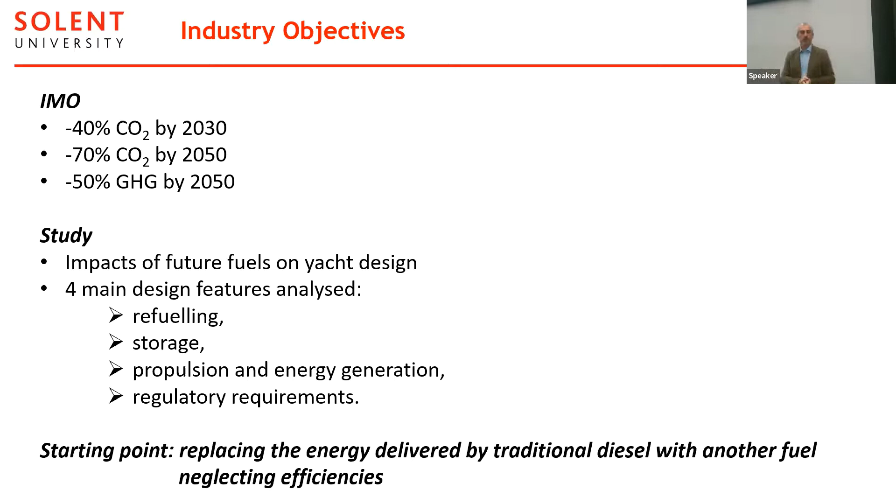Next: the starting point is a kind of modern super yacht, an explorer yacht, 68 meters, able to cross the Atlantic. This was developed as part of the course in super yacht design here at Solent. We are really interested in the main characteristics of this yacht in terms of engine requirement: two engines of 1,678 kilowatts, and the amount of fuel able to cross the Atlantic.

So with an autonomy of about 4,000 miles, with the amount of fuel we need, we need to design on board a storage of 109,000 liters. That's basically our starting point. And from this amount of fuel, we've worked with equivalent fuel to see what happens if we need to swap tomorrow to different fuels.

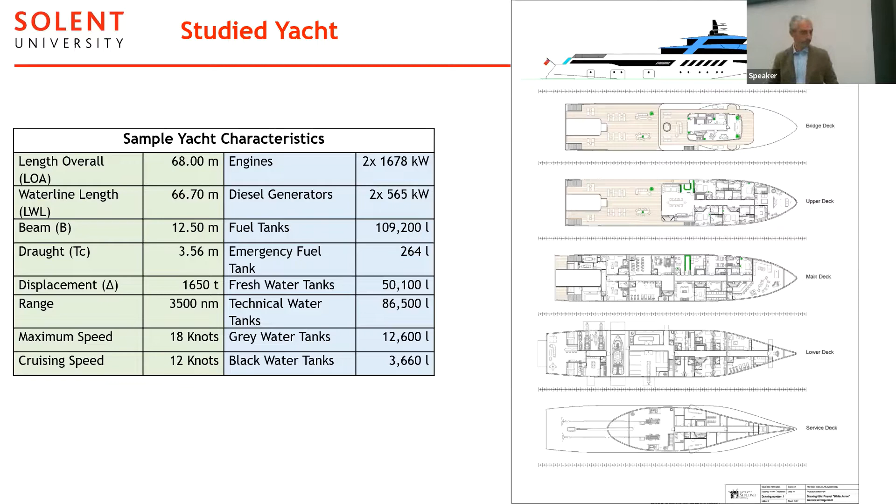In order to assess how good some alternative fuels can be, we took part of this work developed by DNV. This is an assessment for conventional diesel as benchmark, compared against biodiesel, renewable methanol, renewable hydrogen, and renewable ammonia. DNV GL develops a map where they grade the fuel on a scale from 1 to 5, where 1 is really bad and 5 is really good, rating the fuel according to a series of parameters.

Depending on the parameters you take into consideration, some fuels can be more competitive compared to others. So if we think about 5 primary criteria - energy density, flammability, toxicity, local emission, and greenhouse emission - you can see that if you draw the average, biodiesel becomes green, and that's the most efficient among the 5 fuels.

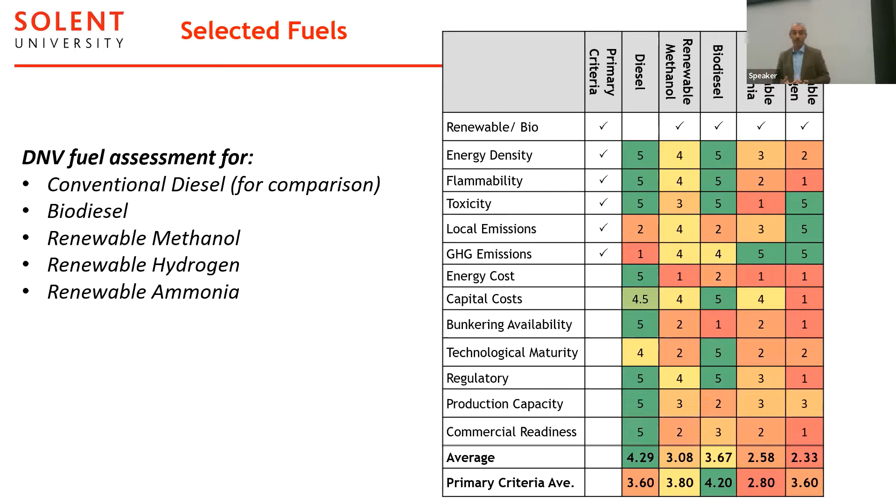While if we consider all the criteria, we can see that the first one to come in our rating is diesel. So the assessment of the fuel basically needs to take into account different factors, not only the greenhouse emission, but also other factors which are sometimes relevant for the owner, like capital cost, energy cost, bunker availability, and technological maturity for the operativity of the ship.

To compare energy from energy, we start with conventional diesel: 35 megajoules per liter in terms of energy production. We require 109 cubic meters for an equivalent weight of 91 tons. So that's our starting point.

If we swap to different fuels, let's see what happens. Starting from the right, biodiesel has a slightly lower energy density, implying a larger volume of 111 cubic meters and a slightly bigger mass of 103 tons—roughly the same amount of volume and weight. Methanol has less energy density, so you need to increase the volume to 240 cubic meters and a mass of about 200 tons.

Ammonia is a gas at room temperature, so it's very likely that the fuel will be compressed. At 20 degrees and 9 bars, it becomes liquid, so it's a relatively simple process. By compressing it into liquid form, for equivalent energy we need 210 cubic meters for a mass of 128 tons.

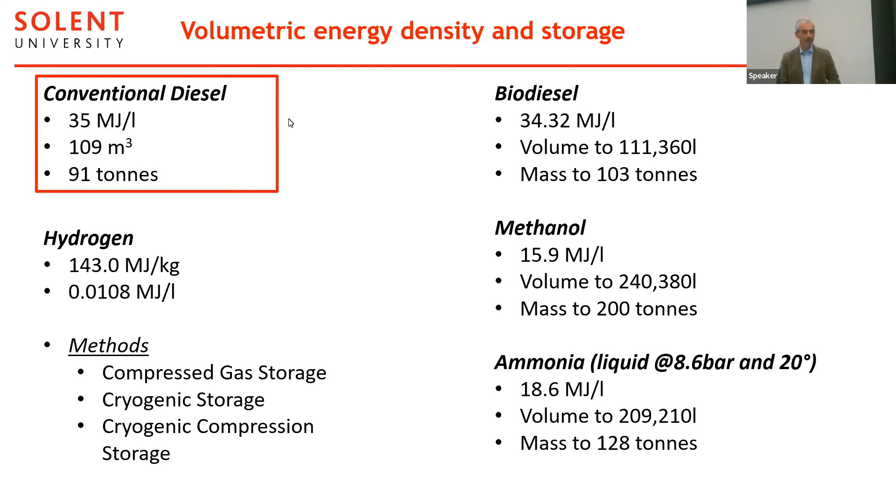Hydrogen is normally compressed at either 350 or 700 bar, giving a density of 2.5 or 5 megajoules per liter. That corresponds to a volume of 1,500 or 3,000 cubic meters and a mass of 774 or 979 tons. Note that this mass includes the storage—hydrogen at high compression pressure can't just be stored in tanks built into the ship, it needs appropriate bottles or containers, so the weight of the fuel here also accounts for the weight of the containers.

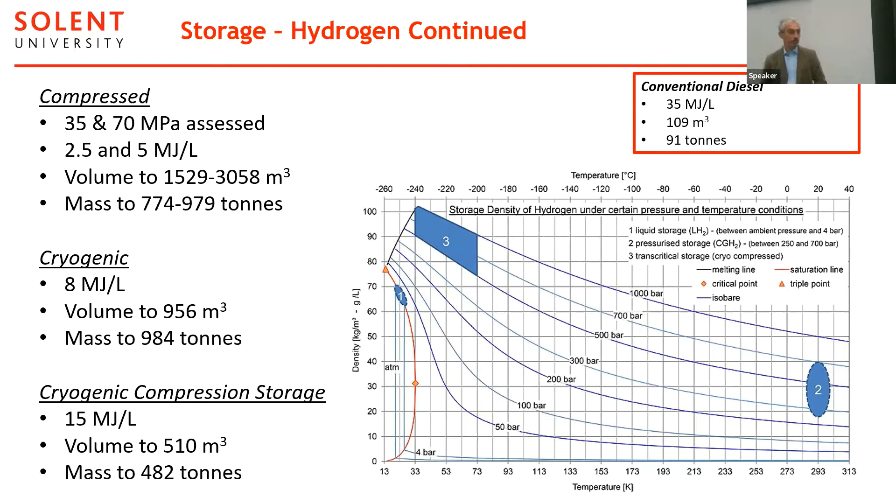We can also compress hydrogen in liquid form—a cryogenic compression storage. This increases the energy density to 15 megajoules per liter, reducing volume to 500 cubic meters and mass to about 500 tons. So that's basically a table which summarizes all the data.

It's quite interesting to see how much more volume some fuels take compared to traditional diesel. The mass might not be too much of a problem, although comparing diesel with hydrogen, we go up to 10 times in terms of fuel mass alone. But the volume we need on board is much, much bigger.

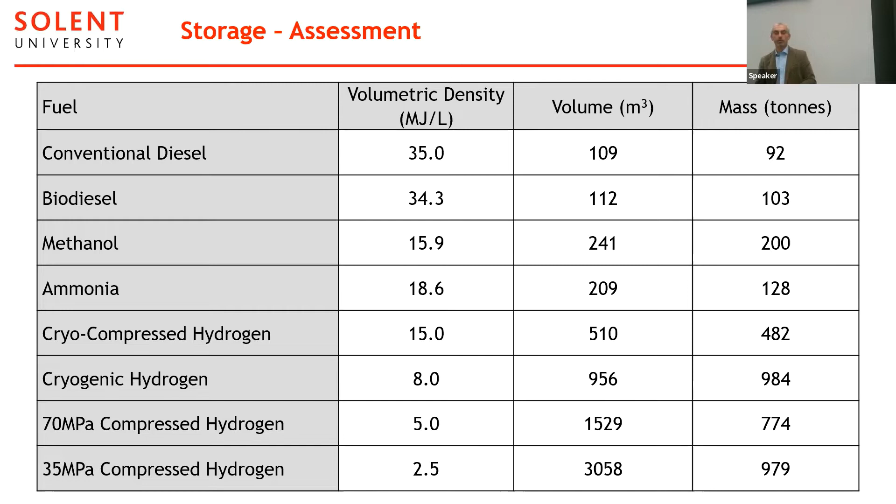We then had a look at refueling options, because apart from storage, we need to get this fuel on board. With hydrogen, there are some options depending on the type of storage we have on board. You can think about swapping the whole tank—take the empty bottles and replace them with new bottles. That could be a fairly easy way.

There are other options involving on-board compression rooms. You take hydrogen on board in a gas state, and then either recompress it to store at 350 or 700 bars, or compress and cool it down to reach cryogenic temperature. Both solutions imply much more volume on board for storage and much more energy to compress the hydrogen and store it.

Refueling for biodiesel is conventional—it's liquid, so it's relatively simple, as it is for methanol. For ammonia, it's very likely that the gas will be pumped on board in gas form and then compressed on board. Remember, the compression is only 9 bars, so it's not too much of a problem, and it's then recompressed on board to be stored in liquid form.

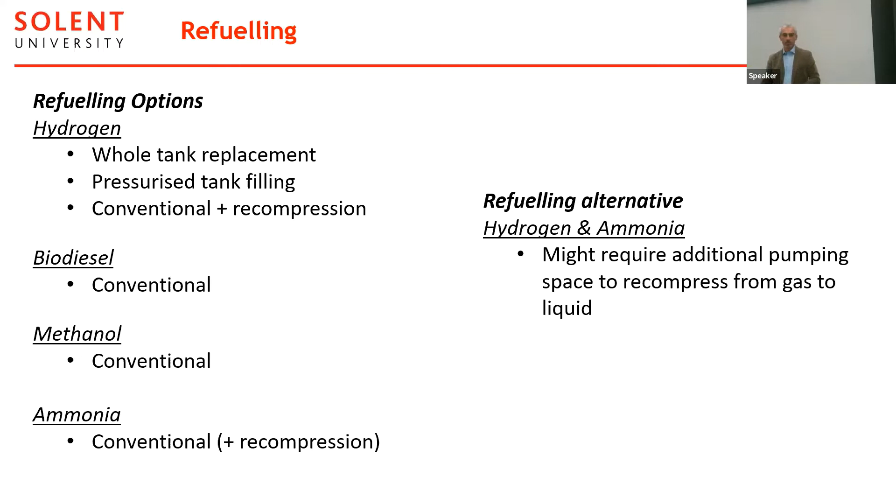In terms of impacts on the propulsion system and energy generation, if you take biodiesel and burn it straight away in combustion engines, you have about a 10% power reduction, just because of the slightly lower energy density that biodiesel has compared to traditional diesel.

If we use methanol, it can be used both in internal combustion engines and in fuel cells. Internal combustion engines exist on the market, and dual fuel engines are available. They can increase efficiency in some conditions. There are attempts to research methanol fuel cells, but at the moment they're really not ready to be tested on the market.

Ammonia can be used in combustion engines. Industry is already producing engines running on ammonia. They had to change the fuel ratio due to the different ratio between ammonia and air, and due to technology related to flame speed in the combustion chamber. There are also some studies on ammonia fuel cells, but again, as with methanol, the technology is too early and there are no commercial applications.

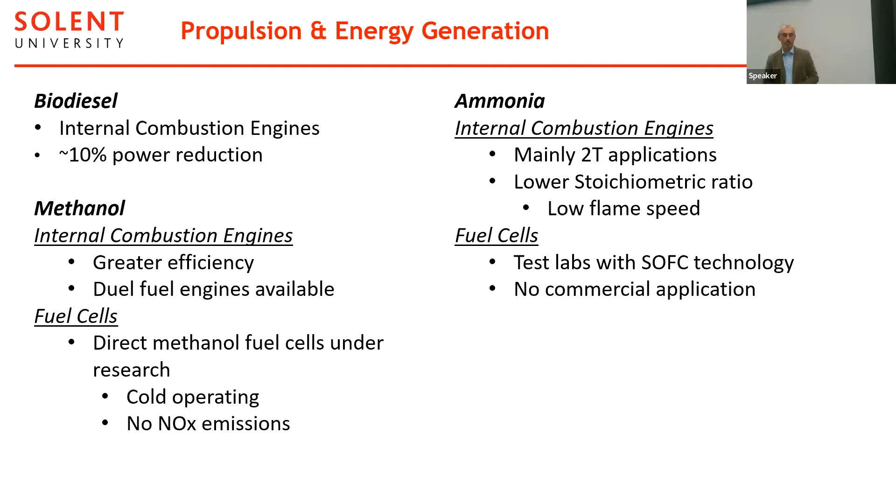If we look at hydrogen, it is widely used in terms of fuel cells. The best way to use hydrogen is for fuel production, which of course produces electricity, not mechanical energy. So that can be a viable solution if you couple your generators with an electric motor, or if you want to use hydrogen fuel cells in replacement of a diesel generator on board.

You can use hydrogen in an internal combustion engine. Ideally there's a stoichiometric ratio of 34:1, but that ratio is a little too high and the engine tends to suffer from pre-ignition, so you need to use a higher ratio, 68:1. That implies you reduce the maximum power by about 50%. To overcome this problem, you need to use turbo compression, boosting, and direct injection systems, all technology to improve energy efficiency without the negative aspect of pre-ignition.

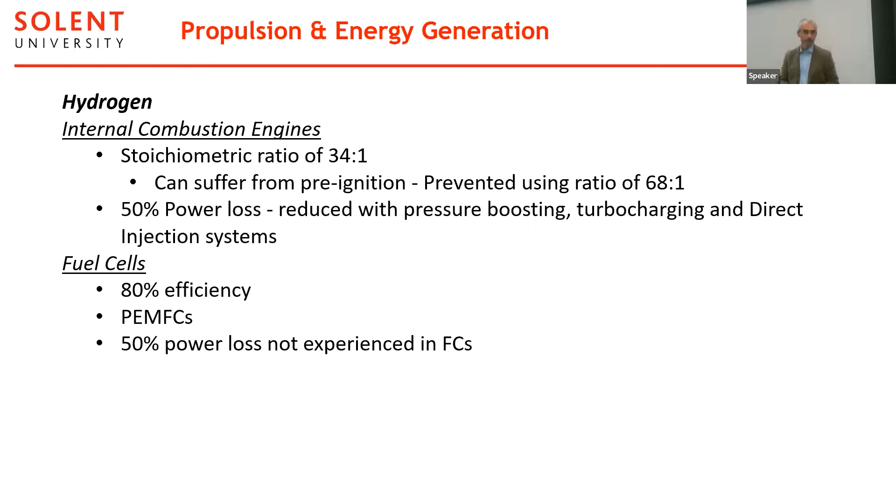So in terms of internal combustion engines, we have full compatibility with the 4 different fuels, with different levels of complication. Biodiesel requires literally minor modification, just the rubber needs to be changed and some other bits and pieces, but very minimal. For methanol, ammonia and hydrogen, we need to bring several modifications to the engine, part of which industry has already overcome. In fact, we have hybrid engines, dual fuel engines with methanol and ammonia-run engines.

Because some engines running on different fuels operate at high temperature, a little bit like modern diesel, there is still a risk of NOx production during combustion. In terms of fuel cells, hydrogen has no problem at all. Methanol, biodiesel, and ammonia fuel cell technology is very early, so there is literally no commercial development at the moment.

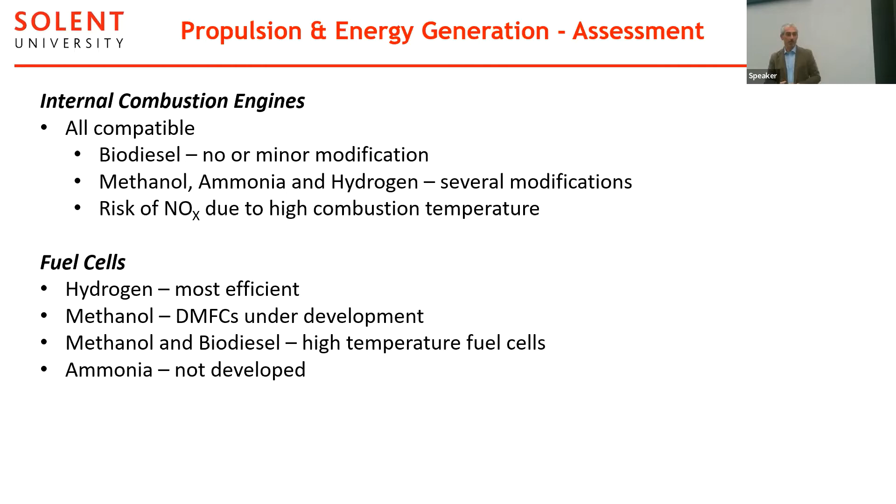The impact of fuel in terms of regulation: biodiesel requires no modification at all, swap one for the other and off you go. Methanol starts to become a little complicated - tanks and pipes need to be 800 millimeters from the ship side. There must be an A60 cofferdam around the tanks, 600 millimeter space, a nitrogen purging system, and piping with double walls and gas tight construction. So a lot of complication in developing the system on board to comply with the rules.

For ammonia, Bureau Veritas has issued a tentative rule with basically the same limitations as methanol. They have the same problems, although ammonia is much more dangerous for the human body. So they are working carefully on the monitoring system for ammonia.

Hydrogen has similar problems to methanol too - a 1.5 by 2.5 meter airlock, 900 millimeter cofferdam surrounding, and compressed storage can only be stored on deck, like LNG. For fuel cells, some rules provide minimum boundaries: the fuel cells need to be gas tight, accessed from open deck or airlock, and have a 900 millimeter A60 cofferdam, effectively to prevent explosion and contamination from pockets of hydrogen, which can easily lead to explosion due to the nature of the fuel.

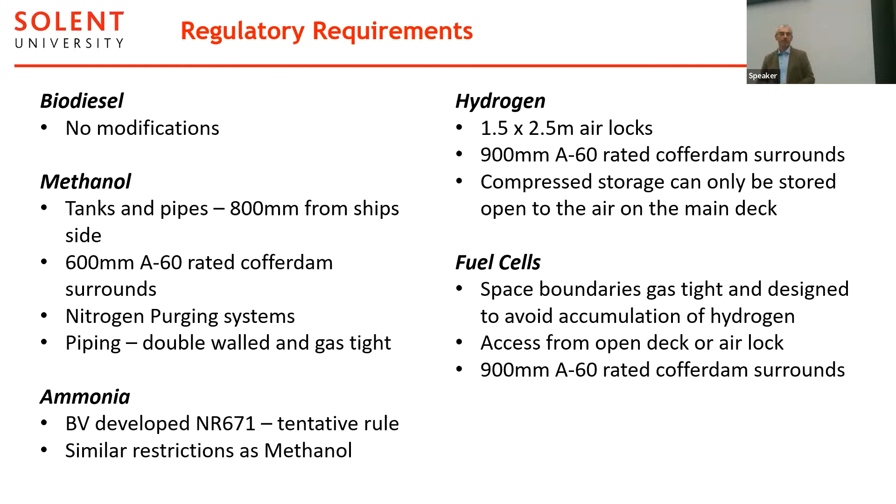So biodiesel has no modification in terms of ship design - again, swap fuel and off you go. Ammonia and methanol require bigger volumes because of the cofferdam, and the design of the fuel system is much more complex. Hydrogen requires even more volume taken by the cofferdam and airlocks. The compressed storage can also cause stability problems, which we'll see in a couple of slides, because it needs to be stored outside.

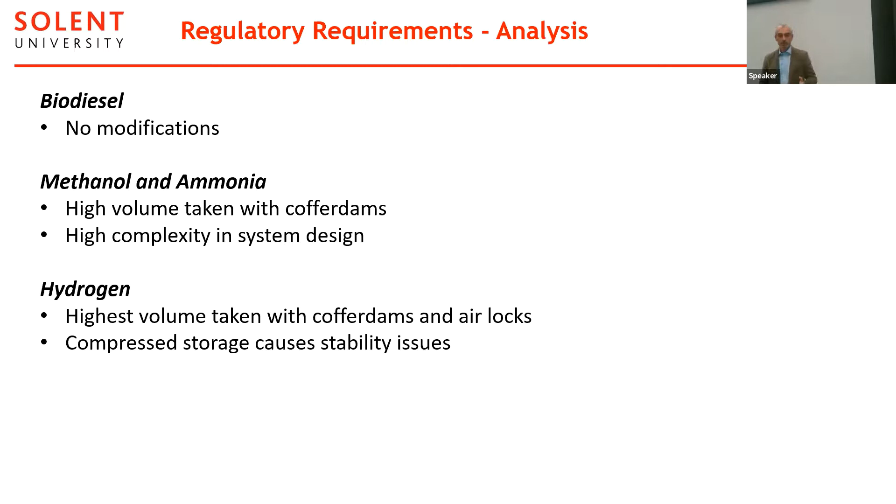That's the summary of the table I showed you before with the impact analysis in terms of mass and volume. Based on diesel, you can see the amount of mass that the fuel is going to take is much bigger, particularly if we start to use hydrogen, mainly due to the weight of the storage that we use.

The same happens if we have a look at the volume and the mass for the ships in the below two rows. The increase of mass is quite significant based on diesel, again due to the big amount of fuel we need on board, but also the weight of the storage system, which starts to become a bit of a problem for hydrogen.

If we look at renewable methanol and renewable ammonia, both increase the mass and volume on board, but not dramatically. So in terms of storage, hydrogen has a lot of problems, while ammonia and methanol have a much smaller impact compared to the other.

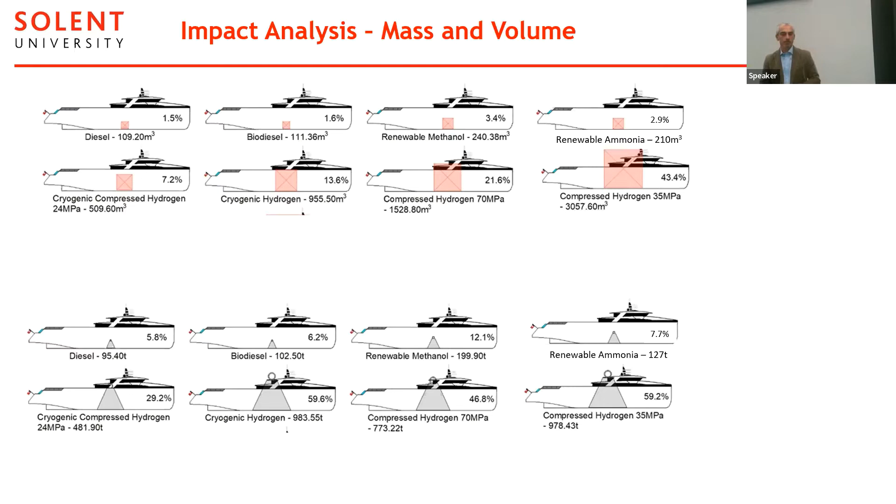The table here summarizes the values of the increment in terms of displacement and final displacement of the ship compared to diesel, and the table on the right does the same but in terms of volumes. So the increases in terms of percentage are quite big.

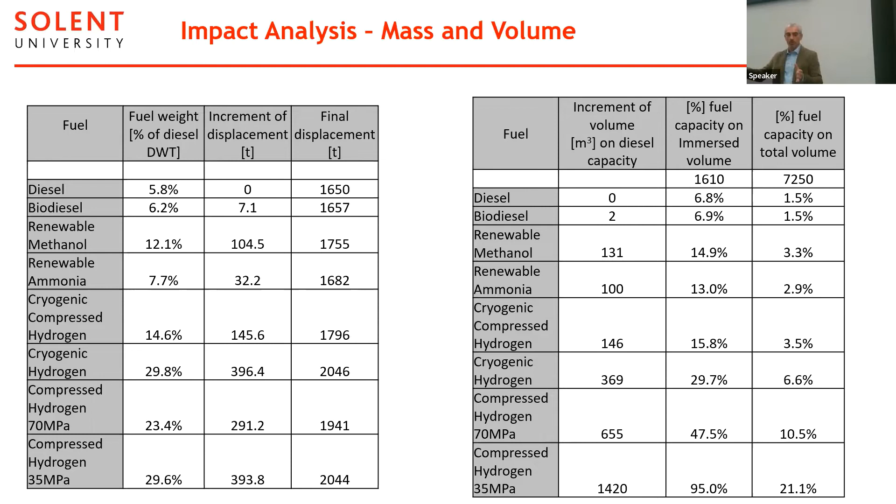These volumes don't take into account any cofferdam, so it's just the storage for the fuel. Also consider that if you store the fuel in small bottles, like hydrogen, the volume you need is even much bigger because you need to store one bottle close to another. So it's much bigger.

The effect of different fuels on stability. Let's start from the worst case scenario: green, hydrogen. Compressed hydrogen needs to be stored on the deck. Take that mass, about 1,000 tonnes on the deck, and the boat becomes immediately unstable.

Compared to a traditional stability assessment, that creates a lot of trouble, of course, because the storage outside required a complete redesign of the boat, a rethinking. You can't just take that mass and put it on the first free deck.

Similarly happens with cryocompressed hydrogen, the yellow line, which shows an instability at 0 degrees. On the contrary, the other renewable fuels—ammonia, methanol, and cryogenic hydrogen—can be stored under the deck. They all show an increase of stability simply because we increase the mass of the fuel below the waterline, so we actually increase the stability. The effect here is positive.

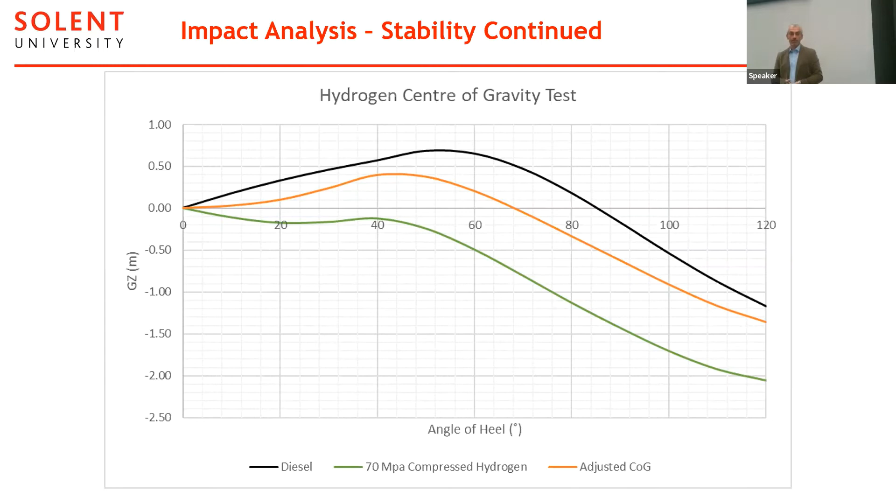So, draw a line and start to see what we can do in the future. I think one of the best ways to move forward, to start meeting the 2030 targets and then moving toward the 2050 targets, is to try to blend the fuel—going slowly toward the transition from using all diesel to using also some kind of renewable fuels. Blend them together.

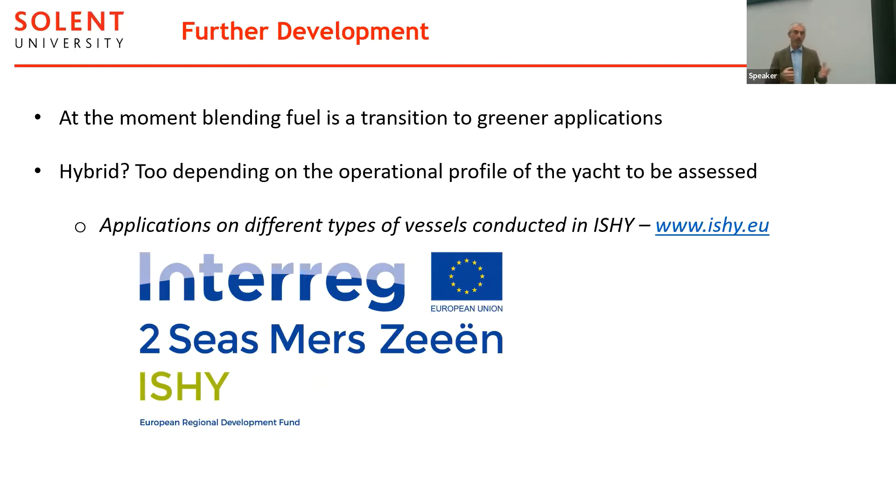It is a possibility. For small ships, hybrid can be a solution. We are studying at Solent some alternatives in a European funded project called ISHY, and we are developing solutions for small vessels up to 40 meters using a combination of hydrogen and electric systems.

So if we redraw a line and say biodiesel is promising, we can use it relatively simply without too much impact on the design. Ammonia and methanol are promising-ish. They both imply more complexity in the system and more cost, due to the fact that you're losing part of the cargo. You'll need more space on board, but it's a concrete possibility because industry is developing engines for those two fuels.

Hydrogen, in terms of internal combustion engine, is very unsuitable at the moment. It's easier to use ammonia and methanol. It is much more suitable as a fuel if we use it for power generation in fuel cells.

Clearly, the analysis that I presented shows that if you need to apply modern technology on a superyacht, you need to rethink the full yacht. The weight increases, the volumes are going to change, so the vessel needs to be redesigned taking into consideration these new fuels. And if you want to use hydrogen, due to the volume of the fuel, that requires a complete redesign of the vessel itself.

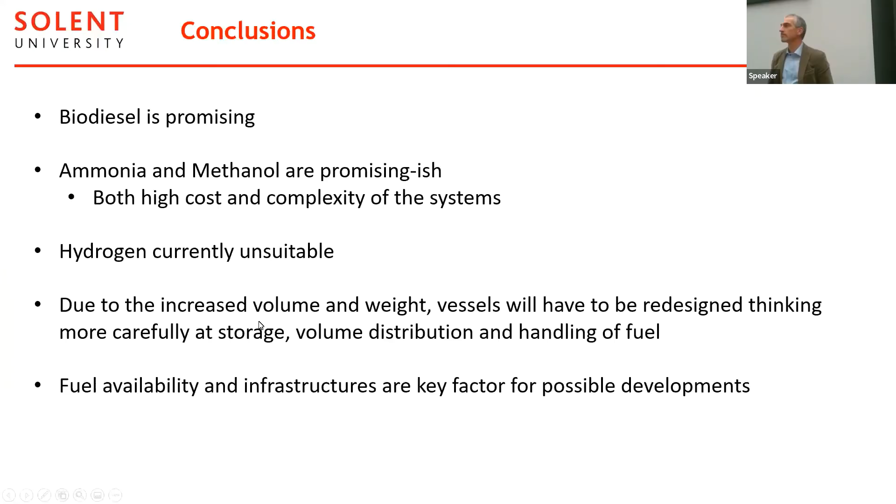We have a couple more questions online. The first one is: do you think there's a place for sails as part of a hybrid propulsion mix for making long passages?

Yes and no. They can help in the way of reducing the amount of fuel we burn. They are not an alternative propulsion system. So if you think tomorrow using a Flettner rotor, something similar to a sail, which has already been tested, that could help in the reduction of carbon emission. It doesn't solve the problem. So yeah, yes and no, about energy efficiency rather. Yes, we work, yeah yes. It doesn't solve the problem of 2050, it helps to reduce the emission for 2050.